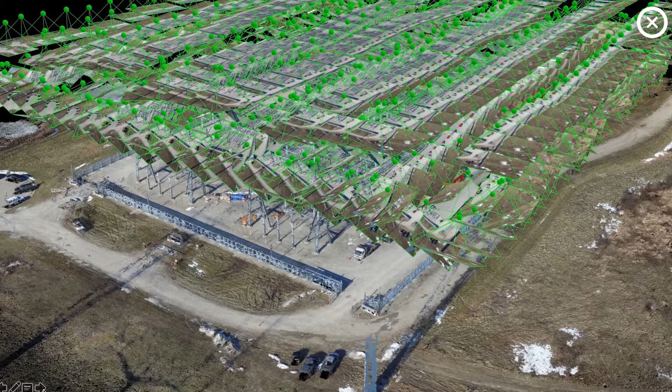In this image, every single one of these green dots is where a drone has flown over a substation and taken one single high-resolution photograph. You can see a little bit of the projection of that photograph here. If I play this video, then you can see all of these photos.

The reason this is a very effective data acquisition technique is because it is very fast, non-invasive, and very cheap. All of this data for this substation was probably acquired in about 45 minutes.

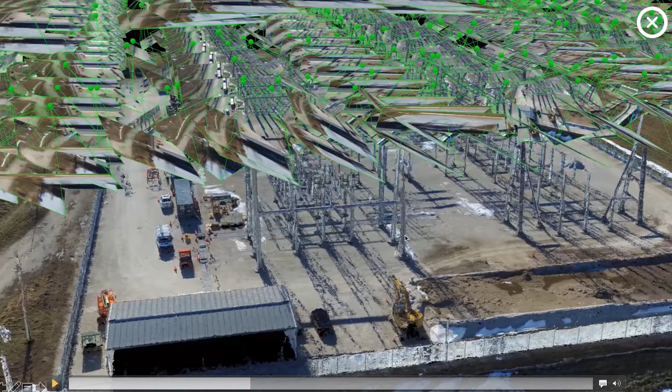What we can do with this data, just from these 2D photographs, is use a technique called structure from motion, an image processing technique that's not worth going into the nerdy details of, but we can employ it to produce 3D geometry, which you see below, from just 2D photographs.

This model of a substation you're seeing here is produced just from these 2D photographs from a drone. We can fly the drone over a substation, which takes about 45 minutes to gather the photographs we need, and then very quickly, generally overnight, we can produce this 3D model using nothing but those photographs.

So flying the drone is a great start technique. It's not perfectly robust, it can't do everything, but it's a great start. We use different techniques because each of them have their own strengths and weaknesses.

The drone is really great at characterizing the topography and the terrain—all of the actual ground, the hills and valleys, all the nooks and crannies. It does not do as well at spatially characterizing all the little gizmos and gadgets within the substation; we use a different technique for that. But for creating a perfect 3D digital replica of the terrain, the drone does a very good job.

And so that's step 0. Step 1 is getting in there and actually laser scanning.

A laser scanner is a range finding device that sits on a tripod and sends a laser beam out. That laser beam hits something and flies back, and based on the time of flight of that laser beam, the unit knows exactly how far away the object was that it collided with.

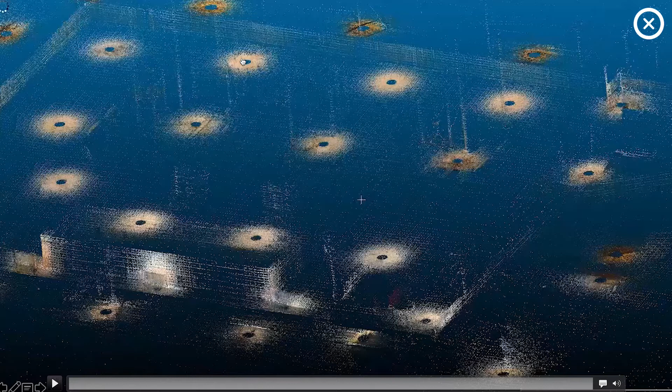If we look at the terrestrial laser scanning, all of these circles you see before I play this video are where the laser scanning unit was set on the tripod. This video shows you how all of those laser scans are brought together into one single 3D model. In a second you'll see a clearer fly-through of the point cloud.

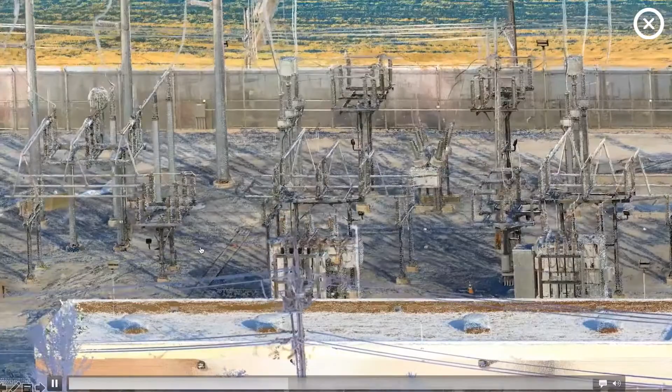This gives you a sense of just how dense, robust, and complete this 3D model is. The laser scanner is very good at getting all of the little gizmos and gadgets of the substation, but because it's a ground-based technique, it sits on the ground, so it is not as good at capturing all of the terrain.

You can see also we use the laser scanner inside the control rooms to get every control box, every switch, panel, piece of conduit - all of that gets baked into the 3D model. So that is flying the drone and using the terrestrial laser scanner.

Now that gives us a perfect 3D representation of everything above ground, but we also want to see everything below ground, and for that we use ground penetrating radar. Ground penetrating radar is just like an ultrasound on a pregnant woman - it sends waves into the ground, and based on the reflections of those waves can give us a sense of what's going on below ground.

Now, one thing that's important to understand is it's not X-ray vision. We can't see perfectly clearly into the ground and get a sense of everything going on. It's not a perfect science.

So the way that we do this is we use ground penetrating radar as a confirm-deny technique with the as-built. We will procure the underground utility as-built from the utility for a particular site, and then use ground penetrating radar to confirm or deny the accuracy of those as-builts.

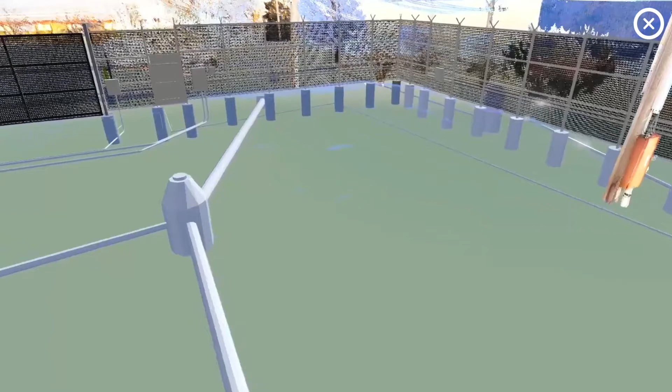Let me fast forward this video forward just a little bit. You'll see this is a 3D model of a site in which we have procured the as-built. We have used ground penetrating radar to confirm what's on the as-built and the depth of all of those items, and then we manually model all of those items in.

So now within our 3D model, with the point cloud from the UAV and the point cloud from the terrestrial laser scanner, we have this model of all of the underground utilities brought into the exact perfect spot at the exact perfect depth that they exist in real life.

So now we have acquired all the data that we need to produce an exact digital replica of a site, both above ground and below ground. But all of these data sets have to be brought into one single space. Right now they exist kind of on their own in different spaces, so we have to bring them together.

We do that by mapping them all to what's called the World Coordinate System, using traditionally surveyed ground control points. We use traditional surveying and aerial targets that appear in both the UAV model and the terrestrial laser scanning model to merge all of these data sets into the World Coordinate System. So this point cloud model, which has hundreds of millions of points, now has each point with a perfectly accurate northing, easting, and elevation associated with it.

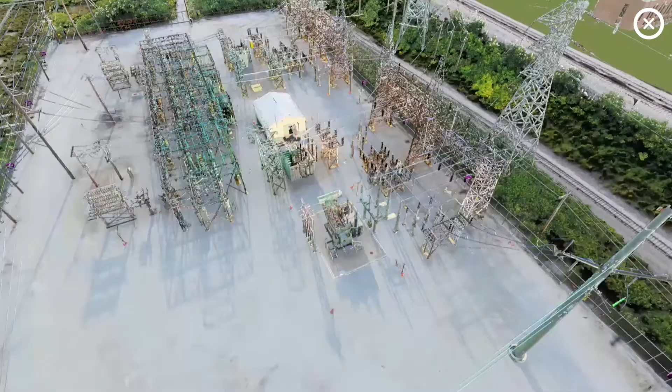This is what gives us a very useful, highly coordinated 3D model that we can start to use for all kinds of stuff. This little demo reel here helps you get a sense of just how robust and complete these 3D models are and can be. We see every nook and cranny of the substation, every suspended line, the terrain - everything gets modeled in, so we can get a sense of just how complete and precise these models can be.

In a second we'll talk about how we can actually use and apply them to solve real challenges. When we talk about applying these models, as mentioned at the beginning of the presentation, we want to focus on four different areas: design and construction, operations and maintenance, physical security, and safety and training.

If we talk first about design and construction - everything we've talked about up to this point is what is called reality capture, capturing the exact geometry of a site as it exists today. But what if the site needs to change? Or what if we want to build a site completely from scratch? Or what if we want to make some kind of facility enhancement - maybe a perimeter security upgrade, a new breaker bay, or an expanded control house, whatever the case may be?

Well, then what we do is we employ what we call VDC, Virtual Design and Construction. That means instead of just drawing all of these new site upgrades in 2D using traditional CAD software, we actually do it in 3D. We build 3D models of what is going to be constructed and virtually construct it. If any of you have a building background, this is a process known traditionally as BIM, Building Information Modeling.

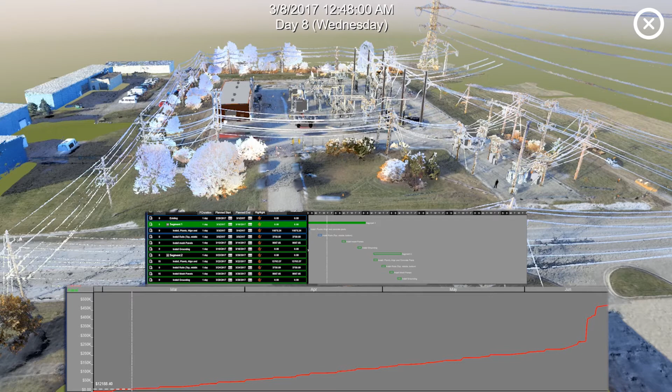The next thing this allows us to do in the design and construction world is a very powerful thing called 5D modeling. We understand 3D modeling, but we can add a few more dimensions to our model - schedule as the fourth dimension and cost as the fifth. If we have a 3D model with cost already embedded, we can marry that model to a construction schedule, a sequenced set of construction activities, and produce what's called a 5D model.

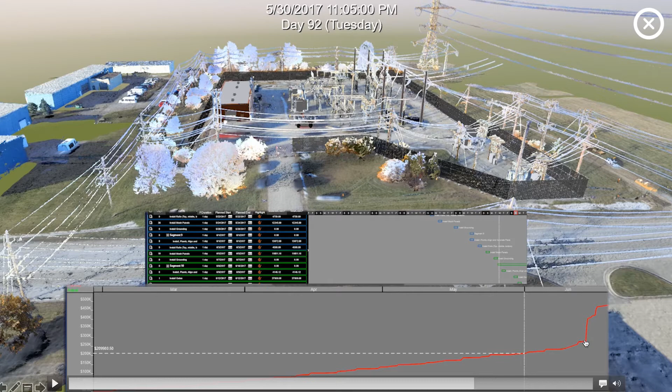And that's what you're seeing here. You see the 3D model up at the top, and on the bottom, this very important plot. You can see this red curve through time, and that is your cash, that is your burn rate through time. And that is a very important quantity.

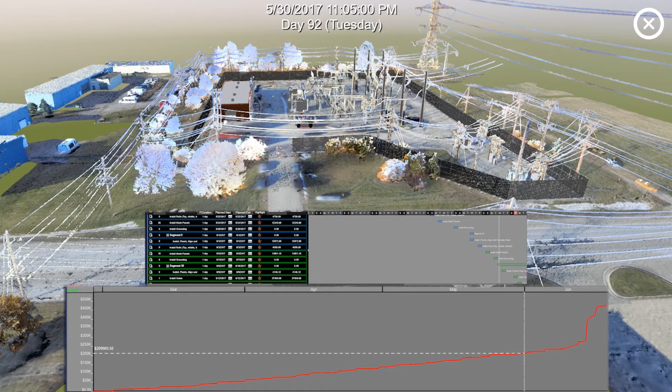It gives the utility a sense of how much money they're going to need to be spending as this project progresses. You can see, for example, here late in June on this particular project, there's a really big cash spike. Who knows what that is? It could be any piece of expensive equipment or whatever the case may be. But it gives the utility a very real sense of when there's going to be these big cash spikes throughout the life of the construction project.

And you have to understand, this is all a design exercise. This is all done before any material has been procured, before any excavator has broken ground on anything. And so this is a very efficient way to front load the design and streamline construction and save a ton of money and build in a bunch of efficiencies.

Lastly, worth noting in design and construction, I know this can sound like a massive paradigm shift, like we're totally flipping the engineering and design process on its head. Is this going to be an impossible thing to sell to the utilities because it's just all new?

What you need to understand is that at the end of the day, we still produce a 2D set of design documents, bridging documents, construction documents, whatever we want to call them. We just use the 3D model to get there. And so any change that's made in the 3D model automatically propagates to the 2D drawing set.

So at the end of the day, we're still producing a set of drawings, but this drawing set is much more comprehensive, much more robust than traditional drawing sets because we've used the 3D model to produce this, and because we have a construction schedule synced up to this model, because we have cost data embedded into the model, this drawing set is not just a schematic drawing of the design intent of whatever the project may be.

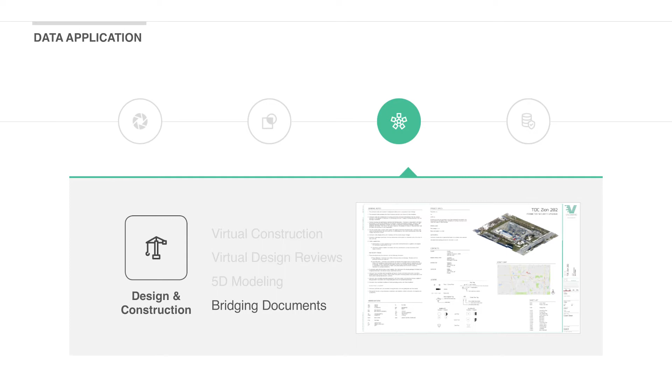Because everybody knows when a contractor is faced with risk, the only thing that they can do to mitigate their risk is to add money to their bid. So anytime there's any kind of uncertainty, when they don't understand something, they just add money, which costs the utility more. But when we can issue an incredibly complex, robust, comprehensive design drawing that has a complete bill of materials at the end...

has cost data associated with it, has a schedule, you're basically telling the contractor, Mr. Contractor, here's what we want you to build, here's how much we think it's going to cost, and here's how long we think it's going to take. And that allows the contractor to bid much more competitively because a lot of his risk is now gone.

So that is the benefits in design and construction. The rest of these are going to be much shorter, so don't worry. But design and construction, there's just a ton of application, and it's really where we really shine, vScenario, as an organization. So I wanted to spend a good bit of time there.

Now, one of the powerful things when we talk about operations and maintenance is, the utility has, let's just say for the sake of argument, they have spent money to go out, fly the drone, laser scan, produce this 3D model. And let's say they've even used the 3D model for some kind of construction project. Maybe it was an expansion to an already existing site. We used the 3D model, we designed in 3D, produced our drawing set, put it out to bid, got the project done, completed, awesome.

And so it's done. Well, traditionally what happens is this 3D design model just dies. It goes into a black hole, into a vault, and nobody ever sees or hears from it again. But you need to understand that this is an incredibly powerful tool ongoing as a facility maintenance tool.

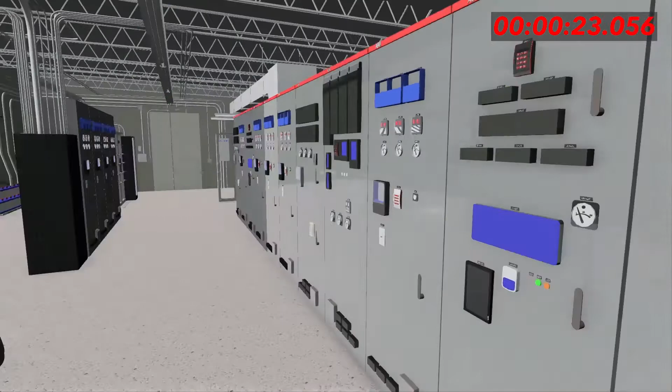One of the most powerful applications for 3D models of power and utility sites is for safety and training purposes. Virtual reality training inside site-specific digital replicas is the most effective way to train, because the best way to learn anything is by complete immersion. Imagine using a specific model to run different emergency response scenarios. A training subject can be tasked with an issue, placed in the training environment, and scored based on how quickly they can resolve the issue while following the correct protocols.

The model can also be used for hazard identification training. Imagine placing new hires inside a model and asking them to safely navigate a site and identify pre-modeled hazards on that site. This creates unprecedented situational awareness by allowing personnel to see real hazards within real sites.

The 3D environment can also be used for contractor or vendor onboarding. Imagine being able to put contractors in a model of a site they are going to begin work on in the future. This would allow them to get acquainted with the site, its hazards, and logistical challenges from the safety of a computer without setting foot on site. For these reasons and many more, leveraging virtual reality and 3D models is revolutionizing safety and training for power and utility organizations.

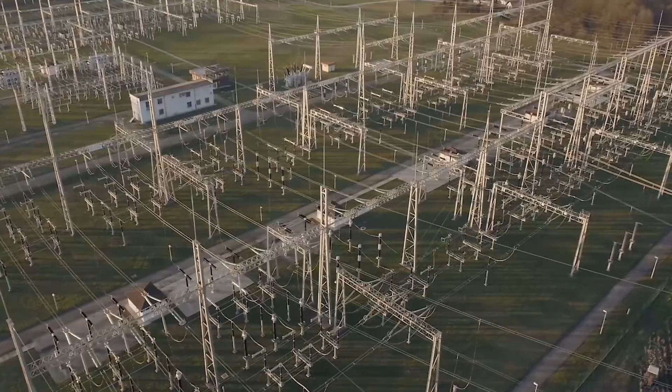SiteSpy is a web-based software application for managing critical asset site data. From aerial photography to point clouds to as-built drawings to site documentation, SiteSpy centralizes site information in a user-friendly interface.

Imagine if executives, engineers, O&M personnel, or security professionals could access important site data when they need it. All sites are organized in a user dashboard according to user preferences for easy navigation. When a site is selected, the user can explore 2D and 3D datasets along with centralized site documentation.

Engineering drawings can be digitized and overlaid on aerial photography, making rolled-up paper as-builts a thing of the past.

Ortho-rectified aerial photography from a drone is a useful tool for logistics planning and up-to-date site imagery. Because the image is ortho-rectified, it can be measured for quick takeoffs and planning, and notes can be added to share with colleagues.

Traditional site documents can also be uploaded to a file sharing section to further centralize important site data. From engineering working files to site-specific safety information, accessing site documents can be made more efficient. SiteSpy can also be integrated with other legacy document management systems to avoid costly and time-intensive migrations.

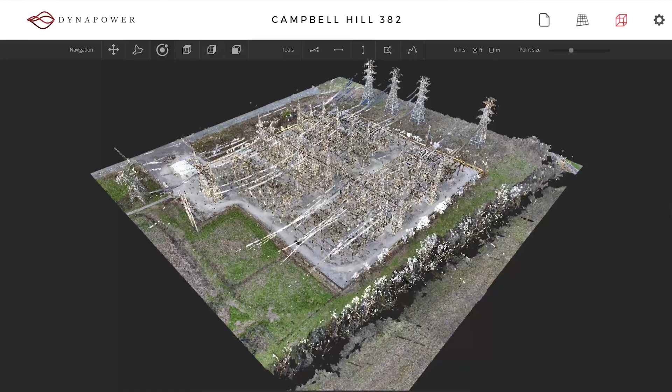Lastly, SiteSpy allows all users to interact with 3D datasets without complex software, hardware, or engineering prowess. From executives to engineers to operations and security personnel, SiteSpy provides a mechanism for getting the most life and value out of data that has already been paid for.

By maximizing the efficacy of acquired site data, SiteSpy is revolutionizing the way that critical assets are managed.

As far as the security of this data goes, without going into a huge tangent about the security, we leverage a service called GovCloud by AWS, Amazon Web Services, to store all of this data. GovCloud is a dedicated US-only secure environment from Amazon Web Services.

You have to actually apply and be vetted to even use this platform, and it is as secure as civilian data can get. This is what is called CUI, controlled unclassified information. So it's not classified information, but it is sensitive and in the best interest of United States national security. We want to control it.